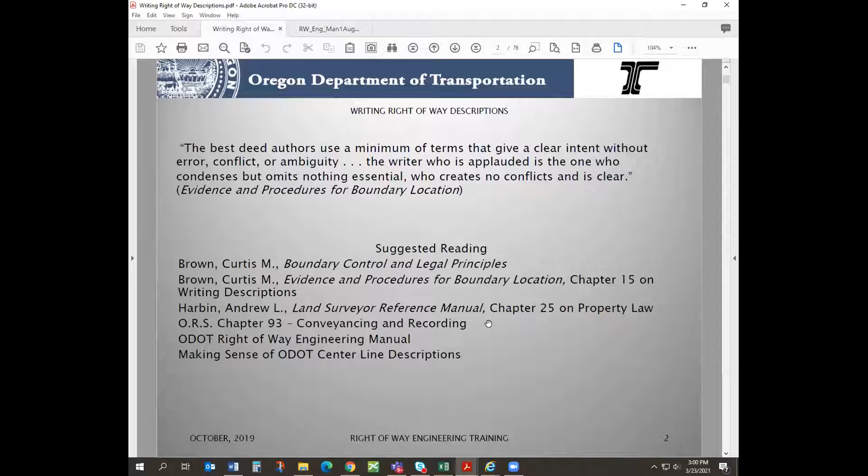Also, there's suggested reading, and you can do this if you want, but I would suggest the description writers review all these. They probably already have, but it's always good to go back to them. There's some suggested reading.

Now, the thing that's important to understand about description writing is that it's just one part of the deed. There are all the statutory types of deeds, but the deed is made up of a type of deed form, and it's got conveyance language in the front of that, and it calls out the grantor and the consideration and the grantee, and then it has a description.

But most ODOT descriptions - there's some of them that aren't this way - but we usually refer in the deed to an Exhibit A. And then in that deed, they go over conditions and covenants and restrictions and easements, and then they go over the signatures, and then they get to that Exhibit A, and then they have a county stamp at the end. That's how you know, because a description that isn't, or a deed that isn't filed, is no deed at all. A deed has to be recorded. So anyway, this is the part that a description writer deals with, and that's their bailiwick.

All this other stuff is the bailiwick of really a lawyer.

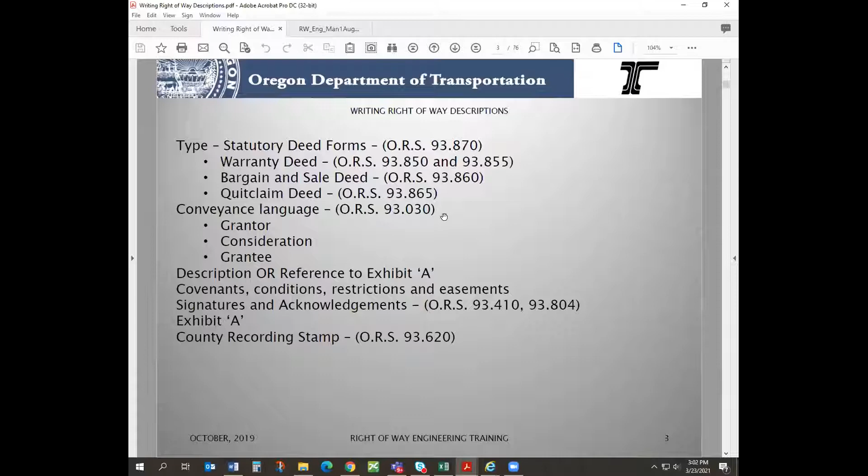So our right-of-way people are in charge of that, and DOJ controls a lot of those languages. That's a lawyer's job - you might be a surveyor and a lawyer, so you could do the whole thing, but this part is only about that exhibit part, the description.

This is from Evidence and Procedures for Boundary Location, describing what's desirable for a land description. It contains a title identity, it's not going to interfere with other senior rights, and it should be written so that either at the present or in the future date, it can be located by a competent surveyor - all surveyors are competent, I'm sure.

And if they're not competent, the board and the lawyers hold them to it. It should not contain words capable of alternate interpretations, like ambiguities. It should contain measurement data sufficient to describe an area of land that closes, and it should be based on a recent survey.

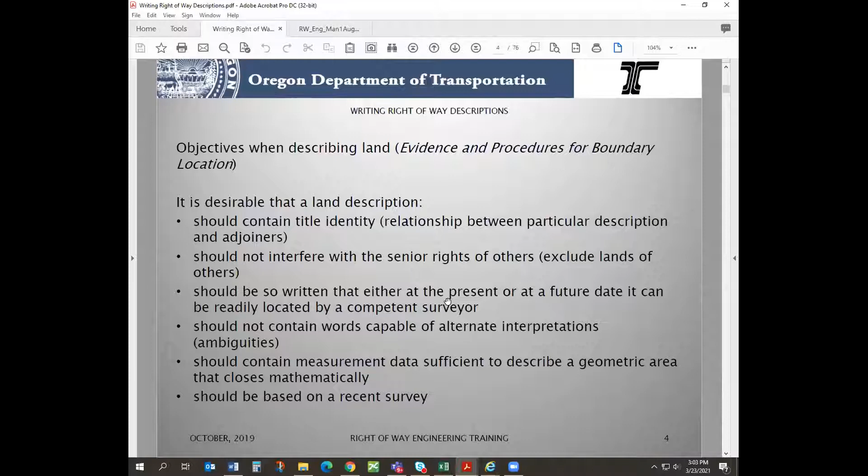This is background stuff, but when writing descriptions, there's some rules you could follow for construing descriptions if they're doubtful, or there's not sufficient circumstances to determine it. But that's if the description's doubtful. Even then, we use these different things to determine what the description is referring to and what it's actually describing.

This is how we get away with it, because once it's a deed, it's the deed, and unless it can be proven there's an error in it, it's going to hold. So if there's ambiguities in it, this is what a surveyor uses to figure out the ambiguities.

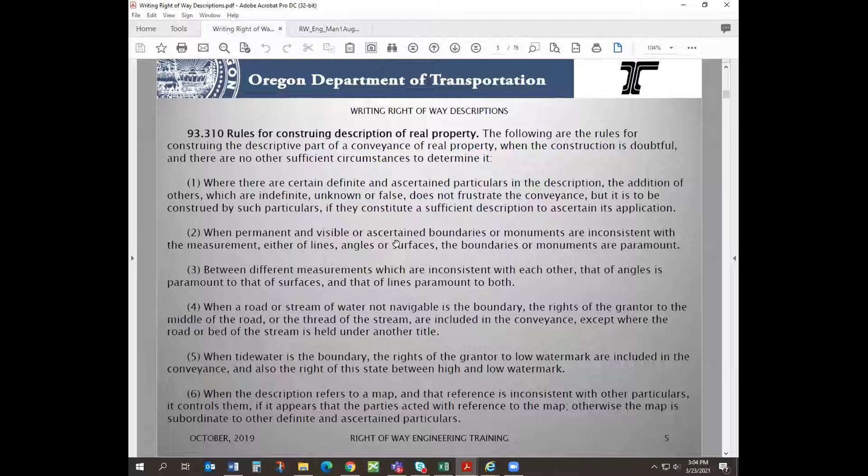I'm not going to go over that, but I'll just go over this. You can read these. We're going to have all these things on the internet.

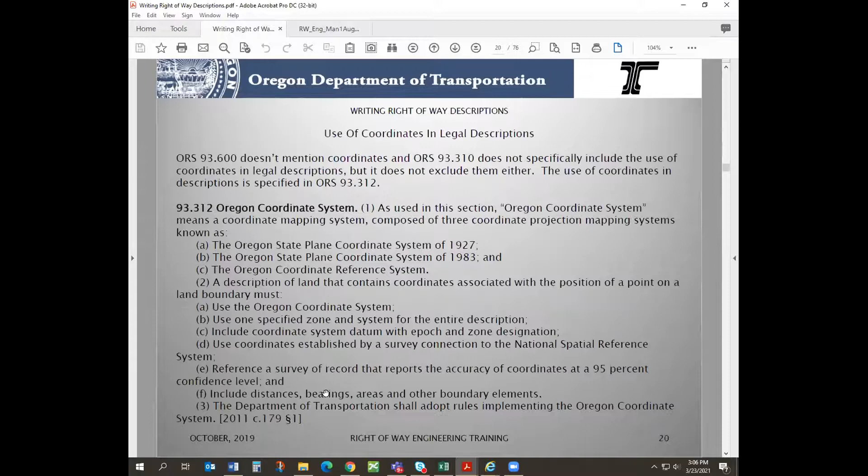This is all kind of background information. I'm going to go over this quickly too - this is about coordinates, and Scott put this in from before. But basically, ODOT does not prefer us to use coordinates in the legal description. That's really all you need to know, but description writers can refer to that statute and read through it. It's always good to refer to things again and again to remember.

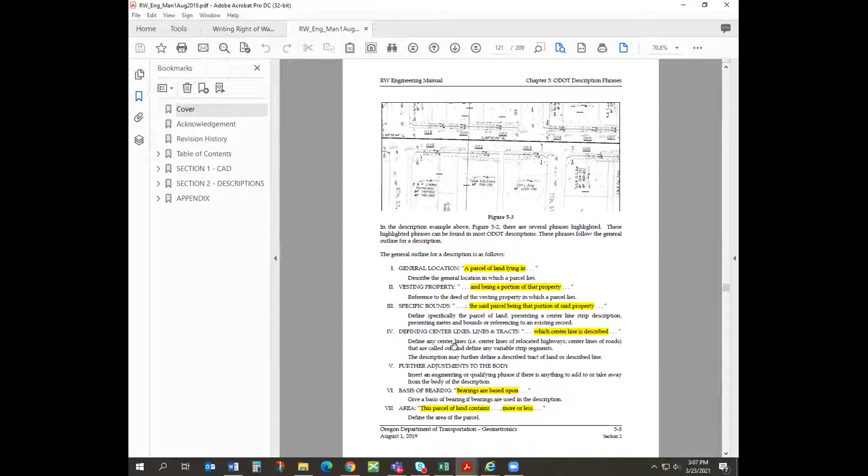Now, this is how our descriptions are basically structured. The other thing I want to show you in the manual is that it's structured a certain way - but in this manual, phrases is the chapter I go to a lot. In that phrases chapter, I show just a generic description, an outline of how that description would go, and then different phrases as you go through the description of how we like to see them written.

A lot of times I'll be going into the manual at this point to see how I wrote that before, and it's just in order of how you write it - that's what I would do as I'm writing the description. This is a really good chapter to review, and I like to open it up like this where you see the pages and the bookmarks labeled. This is a PDF, so you can go back to the cover really fast, or go to different places.

They also have pages, but I think this is better because then you can get around the manual. Another thing I wanted to show you is, let's say you wanted to find out about areas. The quickest way I found to use the manual is just type in areas, and then you can go through and look all through the manual and see where you can find out about areas or whatever topic you're looking at. That's how I find out in the manual how we like to do things.

But let me go back to our topic. The parts of description are written a certain way: there's a caption, there's the body, there's qualifying clauses, and there are augmenting clauses. The caption is just basically saying this is where we are in the survey land - we're in a section, a county, a city, this state. That's just the general idea of where this parcel we're going to describe is at. It doesn't get into the meat of the parcel yet, it's just saying this is generally where it's at.

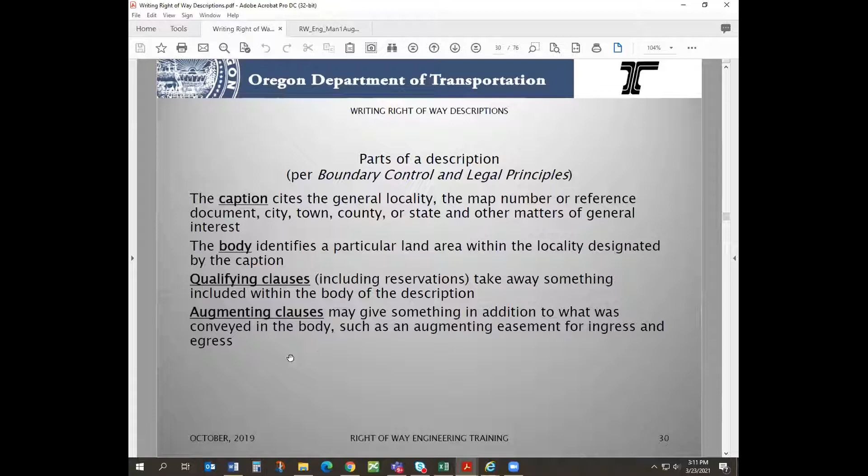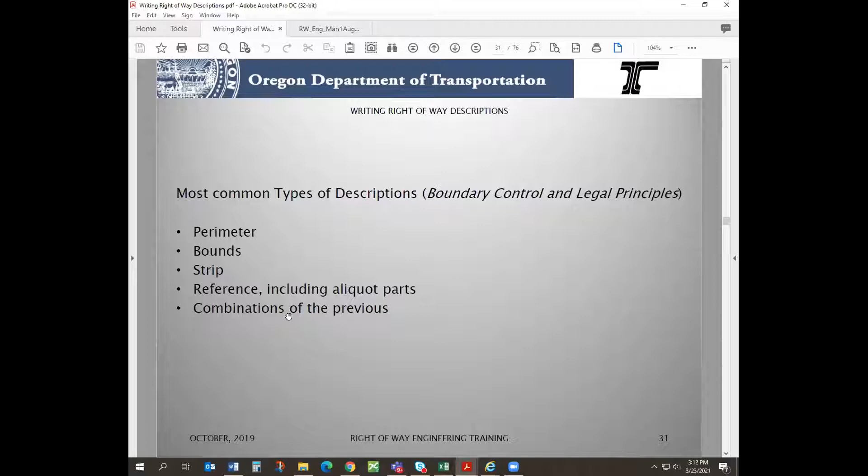Let's go on. So there's lots of different kinds of descriptions. Our typical description, because ODOT's property is mainly corridors, so we usually write a strip description with an alignment in a strip. But you could also do a perimeter - sometimes we write perimeter descriptions when we're talking about land away from the highway, like when we bought some rock quarries, we'll do a perimeter. Or you can do bounds - in some ways everything's bounds though, a strip is a type of bound. There's also references to the main system of aliquot parts, the government property, how it was originally put together, sections. You can do combinations thereof. You can look in boundary control and legal principles to figure more out.

Now, this is just like Mike showed - this is a file description, and this is another thing I want to show you from the manual. There's a certain form we have, and I'm going to go to the cover. This is in that chapter on descriptions, and if you go to the end, you'll find this is the form you'd use for the seed file for a description. I brought one up - here it is, and this is what it looks like. There's two pages, and I always use this to start out a project. I'll do a generic one, then I'll copy this and start writing my descriptions, then I'll just copy them again and change them. This is set up with an addendum, the old style of addendum, and this is the exhibit part.

Now, one thing I want to show you in this file is in the exhibit part, there is a chart in here that's a cell chart, and it's best to use this because then you can just easily go into cells to put your different station offsets. There's also this little end thing, it's best to keep that in there. You can get rid of some of these lines, but I would keep a line, because that makes this other thing work out, this page thing. So just realize that. Now, when I work on this, I always use this copy as my generic.

And this is mainly just metadata that's going to go into RITs eventually. And then in RITs, I just want to go there. I don't know if you guys are supposed to be able to see this, but I'm right now.

So this is like a property in RITs, and this is the legal part of it. And I'm just going to go to file 2.

Anyways, when we're in RITs and we do all this stuff, we will generate an addendum. This one, the addendum has been generated, but what that does is it generates this addendum to look pretty much the same as we had up on our screen there.

Oh, you guys can't see that. But it goes over the same stuff, and it pulls all this stuff. And this access control language, it pulls from the part of RITs that the right-of-way specialist puts in there.

The description writers aren't in charge of this anymore, because like Mike said, we don't want to play telephone and get it wrong. And also you should be at your meetings you get together for the layout meeting. That should all be established by then, and people should know what each file's going to have.

But looks pretty much, this was a generated addendum. I think I generated it, but it pulls all the stuff in, so it looks basically like that other addendum that I say you should fill out.

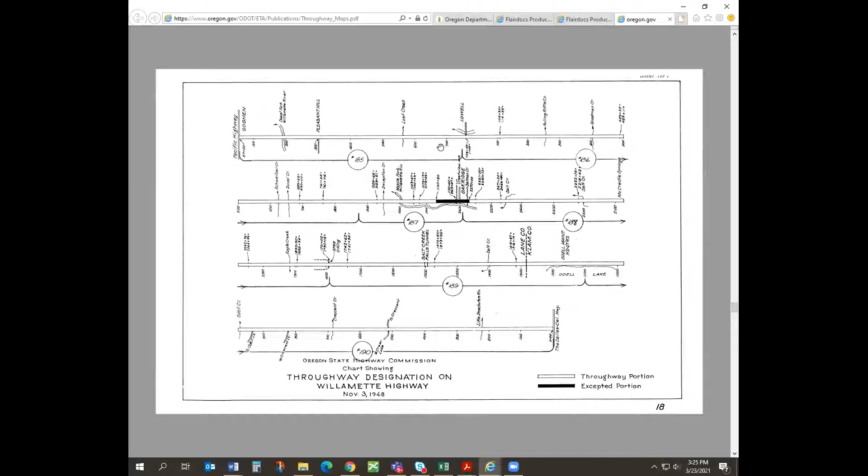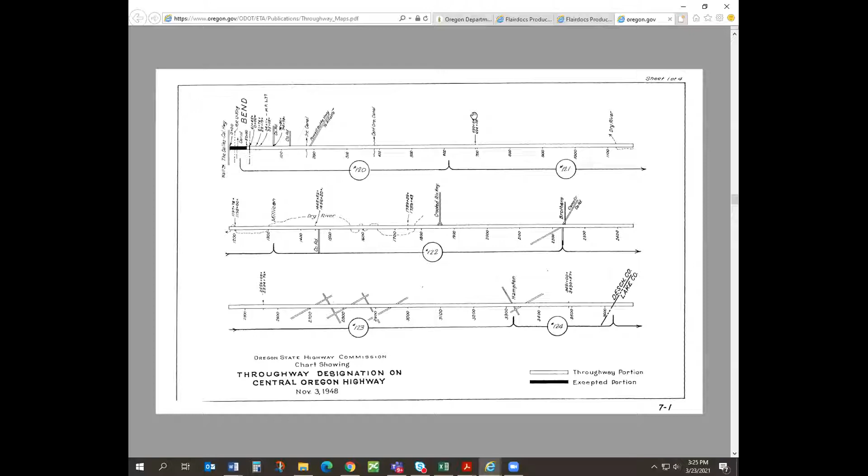Okay, right. And it has to do with access control kind of rights at the time, basically, right? Yeah. It really has to do with that throughway law, and the only reason we still have it is because it was the bailiwick of the commission to determine where the throughway was, and they want to see whether any of this project is on their throughway system.

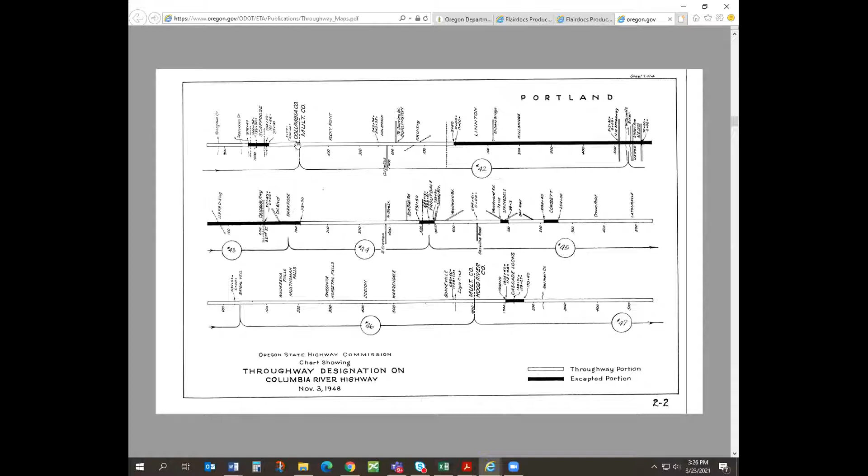But it's really kind of stupid because nowadays things have changed so much. There's probably 10 properties on all these things. But in order to call it a throughway or non-throughway, you have to go by the time of the act. So it's kind of a weird thing.

I hope eventually you might talk to right-of-way people, they might know more about, or the people that give these project files to the commission. But I think that's the only reason we have to put that in there is because the commission wants to know.

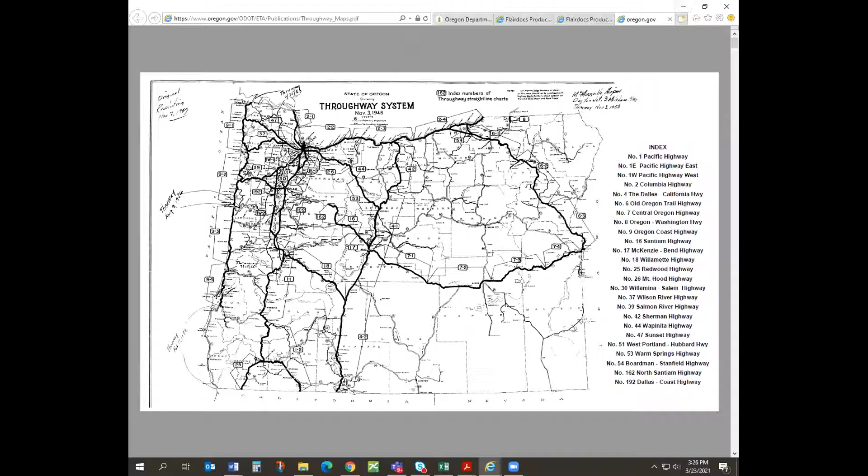Anyway, going back to the topic. We like to put, after that, in the addendum, we like to put the vesting deed owner who we're buying the property from, their name.

If there's only one parcel, we don't really say anything. But if there's several parcels, we'll just list out whatever, like if there's 3 parcels, we'd say parcels 1, 2, and 3. Okay, and then that's what you're going to have in this addendum.

But this stuff will be pulled. If you know it, you can put it here. Up here is just the major control phrase, access phrase. This one is control the highway. Let me show you in the manual where that is.

I'm just going to look up access. Access key phrases. Okay, so there's all these access key phrases, and these define all of them. This is the place to go to look at that. But most of that's supposed to be determined by the access control specialist and the project team.

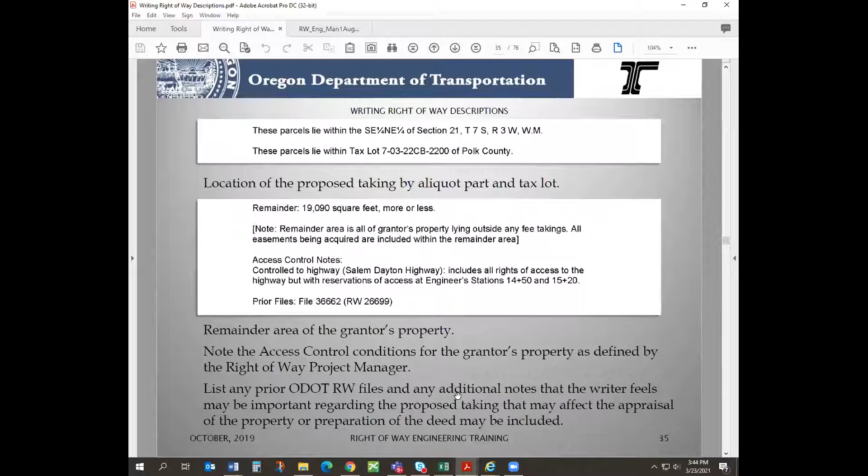Okay, and then you get to the Exhibit A. Our exhibits are such that, like Mike has said, we define whatever, and you need to talk to the agent. Sometimes you have to split these into two files or two parcels, but we usually define all the parcels we want to purchase from the property, from the vesting property. Usually we have all the fees up front, then the permanent easements, and then the temporary easements. Sometimes the first one, if there's any access being bought, is access, and access is a type of fee. It's one of their bundle of fee rights.

And then there's the fee. Okay, and this is part of this. The addendum we're not going to have in the deed, but this is the part that's going to go in the deed, the exhibit. So that's why it's signed.

And at the top, when we come to these later and look at them, the recorded copy, we can tell what file number it was, what drawing it came from, and we want to know the date of the thing. This will be in there too, in Exhibit A. So that's in the header of everything.

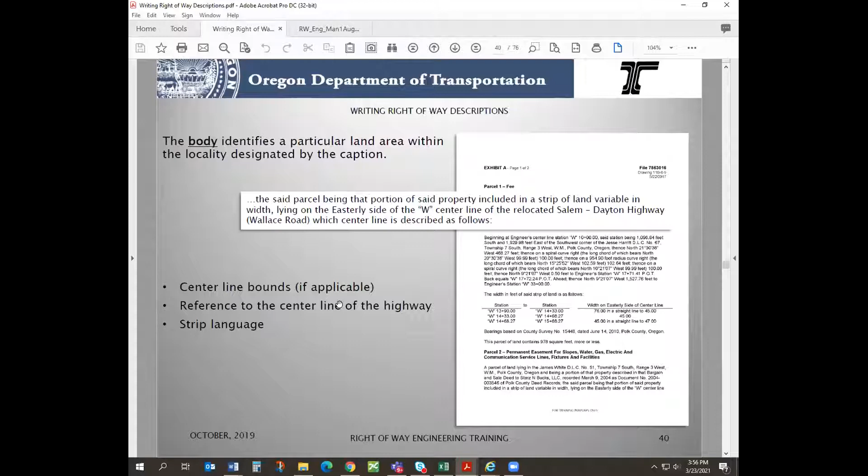Okay, there's another way too, not only to describe property with a bound, and it's not just the center line. Sometimes we use what's called a described line or a described tract. Instead of the center line, we'll refer to a described tract or a described line, and it consistently looks like this.

I keep forgetting to do this, but I'm going to go back to the manual and go back to one of these chapters, because all these examples are right here in chapter 4. Here's an example of a center line, which is described as follows, and this is typically how they all look. They all start at a certain station, and this first station is referenced to a government corner.

Then you proceed on a tangent, and then you go through spirals, and this is the way we like a spiral to look. Thence on a spiral curve, we like to say which way, right or left - this is one time we use right or left. And then the long chord, which bears south, blah, blah, so many feet, and this is the actual feet along the alignment, 100. Then on the so many foot radius curve right, the long chord of which bears - all that information, this is the way we would show a station.

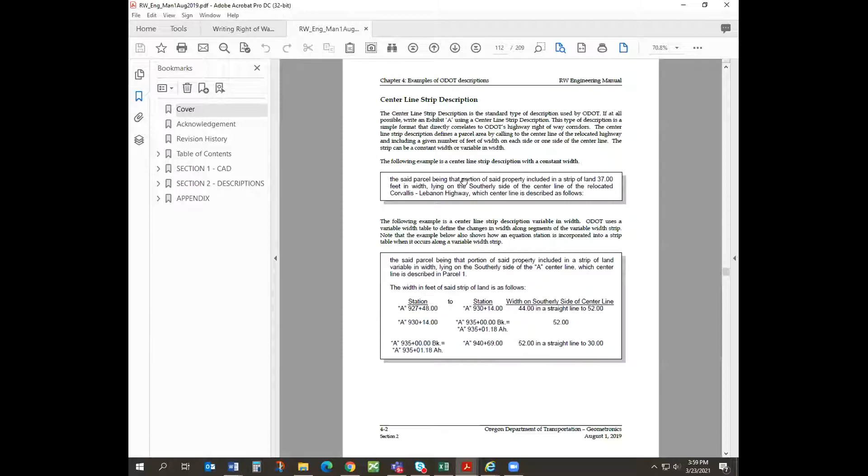And then there's the radius. But I was going to go to the next one too, which is what we're talking about, the described line - that's in here too. This goes over to, see, there's a described line. Usually the body goes, the said parcel being that portion of said property lying southerly of the following described line. There's a lot of different reasons to use a described line. It is a bounding call, because sometimes you can't do a strip description because a lot of the segments are going back on line, so there aren't really a segment. I'll show you that later too, but this is just a way we like a described line to be looked at.

Usually what we do is call it out and begin at a point to a certain station. This is the way we like to say those offset calls, like a station offset call - we like to say it this way, and this is the way we've done it for a long time at ODOT. Thence easterly, we give a directional call, easterly in a straight line to a point opposite and 135 feet directionally of a certain station. Basically it's just a station offset, but that's the way we like to write it. We're talking about a particular point that's opposite and so many feet directionally from a certain station, and that can go on and on. We always use, if you're going to go to a next point, station offset, you would write the same sentence, but give its opposite point and its station on whatever center line.

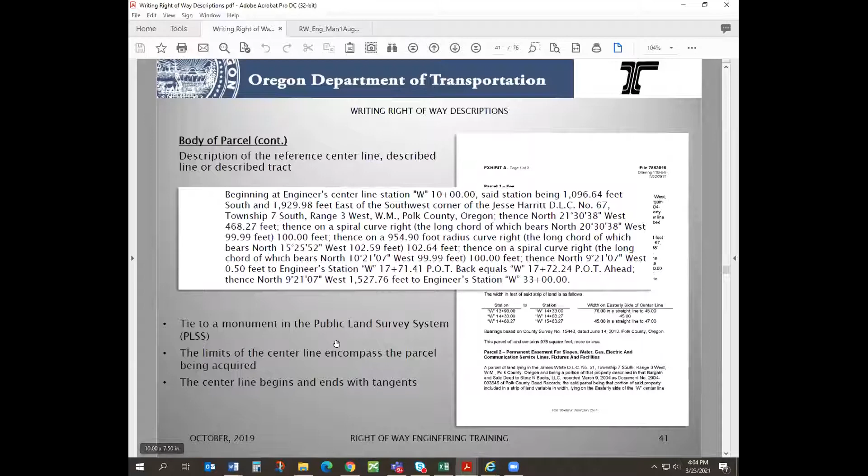Okay, so yeah, that's some stuff we said before, beginning and ending with it.

Okay, then we get into variable width tables. Usually up at the top, when you get into that situation, the said parcel being that portion of said property included in a strip of land, variable in width. So what that implies is, when you have a variable width, sometimes you can have like 50 feet in width, and then you've got it already. You don't have to describe a table.

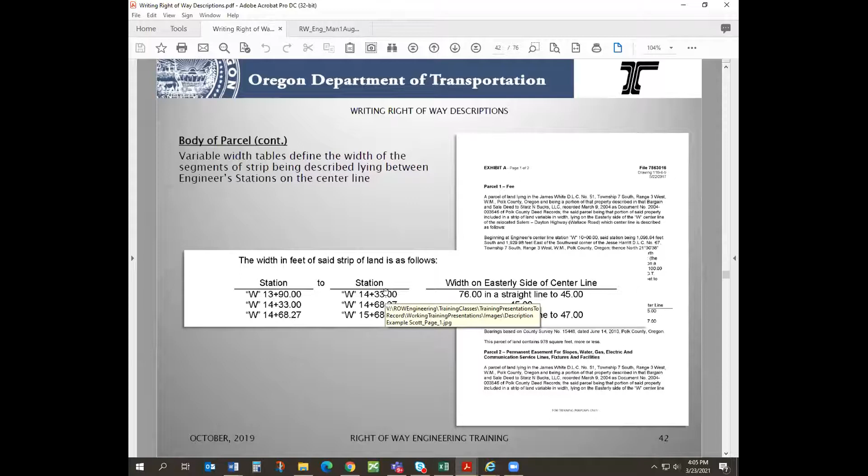But if you have a variable width, then this is the way we like it to look, and then you'll use that table. I'm going to go into this later to show you variable widths more intimately, so I'm going to wait on that.

And then after that, if you have some kind of bearings or distances in this project, like up there, you can barely see it, there was a north, you have to have a basis of bearing statement. Because where does that come from? And then that gets people into what bearing system you're on.

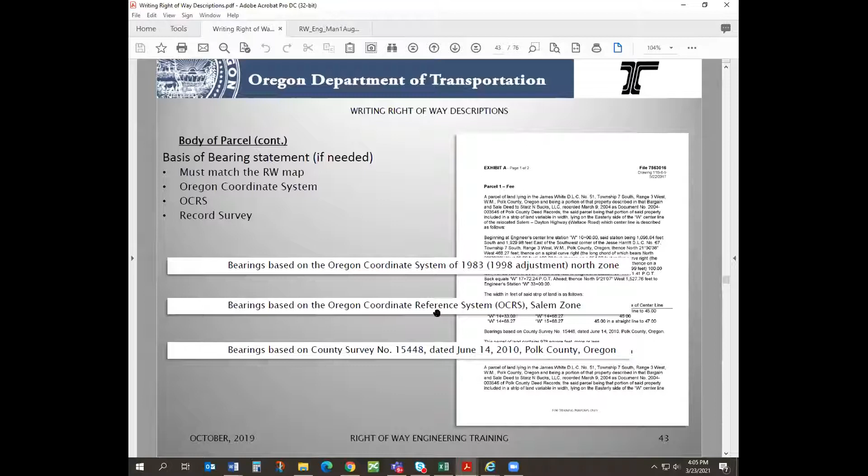You can call out the Oregon coordinate system. There's different ways of showing that. I'll show you in a minute where that is in the manual. They can be based on OCRS, or they can be based on a survey.

Let me go in the manual and show you the basis of bearing. We'll get to here.

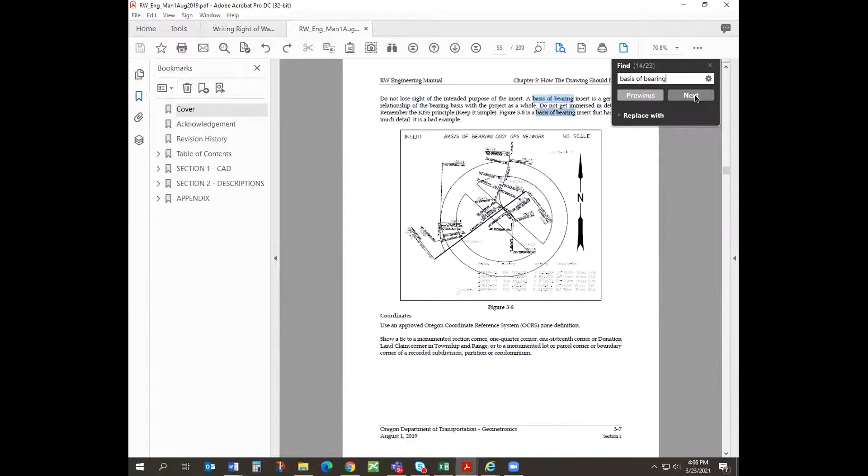There's ways we show it on the map, but there's also ways we show it in the description. Here's some examples, I guess that's on page 36, basically the basis of bearing statement. There's different examples of how we show our basis of bearing statement. Usually it's the last thing we put in the description, except for the very last thing, which is the area.

So anyways, a quick way to look for things in the right-of-way engineering manual, this is all in there, is just to do a find. Let me go back to my...

Anyway, so that's it, and then the area statement is the very last thing. And like I said before, I'll mention again, every area we put in there, we put it to the square foot. If it's over an acre, we'll put acres to the 100th. And we always put the statement, anytime we say an area, we always say more or less.

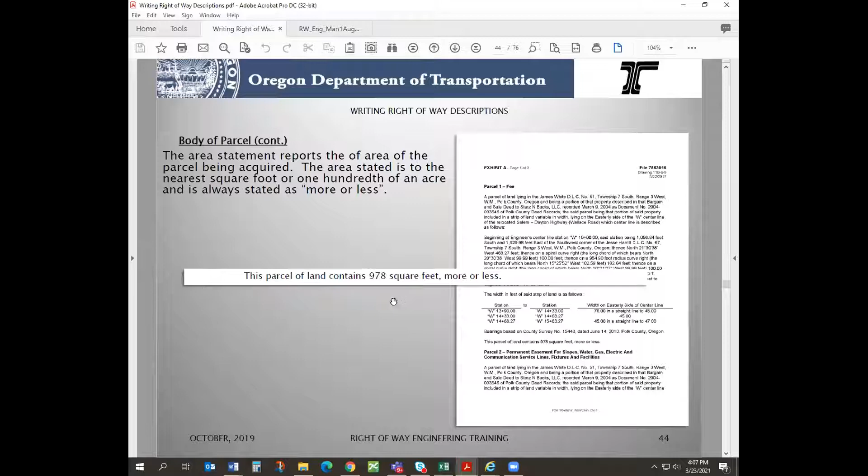Okay, this is an example I want to show you guys. Let's say the property went out to the center line. Their actual property did, but their deed calls it the center of the highway.

Now, when we did our description, I just wanted to note, we will describe this whole fee. We'll call it their piece, bounded by their piece, which is only to here, and we'll call out all the way to the center line. But because of that, we also want to except out. This is one of those augmenting clauses, or take-away clauses. We will say except this property, and call out our deed and stuff.

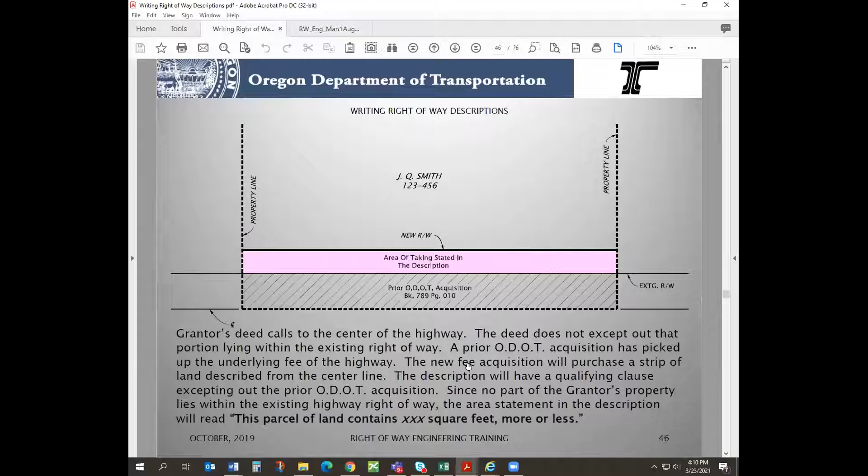So anyway, in the area statement, we wouldn't have to say anything. We'd just say more or less, because that's the only property we're purchasing. We already purchased this, and we'll describe this whole thing, but then we'll except out this parcel we already bought from the description.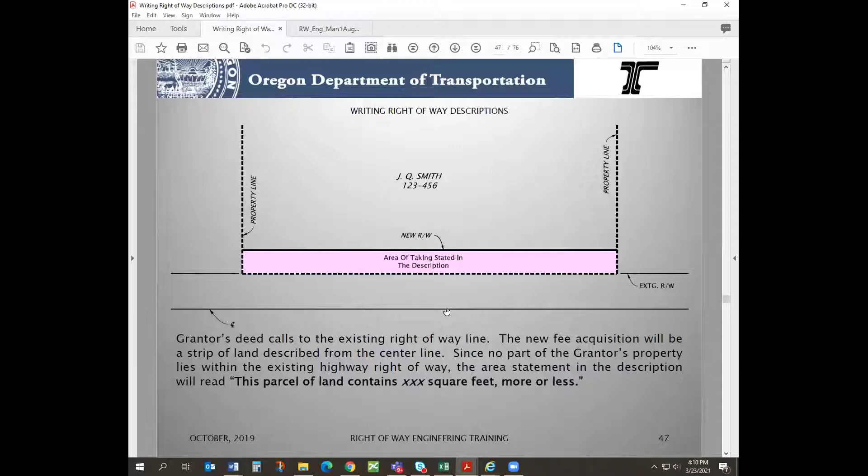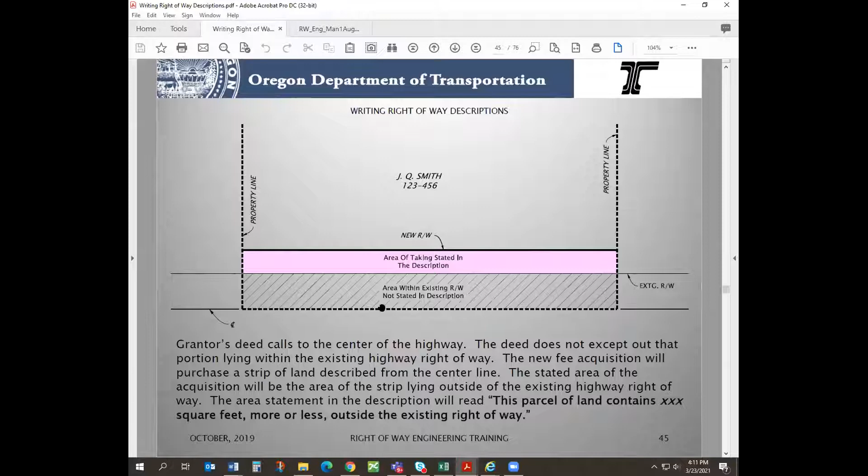So it's important how you state the area. The main thing is this one, where we want to make sure that we tell them exactly what area we're talking about. What area that we're talking about, the whole area, because it describes out to there, but we're only going to say the square footage of the area that we don't have some kind of right to already.

And then I just want to mention again also this whole idea of the qualifying clause. We're excepting things from the description above. We described parcel 1, and we defined it, and then we except out from parcel 1, or except something out of it. And if there's more than one except, let's say we except out parcel 1, but we also except out some other thing that was not part of this parcel we described. If there's a case where there's more, then you just cap 'also except' and go with it. You don't have to bold it, you just cap them.

See, this is excepting out a particular deed. And then the augmenting clause is the same way, with 'one' and 'also.'

You know, when Mike and I do descriptions when we're giving a bunch of our property back to the city or something, we're relinquishing it back, we'll do a lot of these phrases. We'll start out with 'also,' and sometimes I've had 50 'also's,' because we give them a parcel and then all these little pieces of parcels that we don't need for the highway anymore.

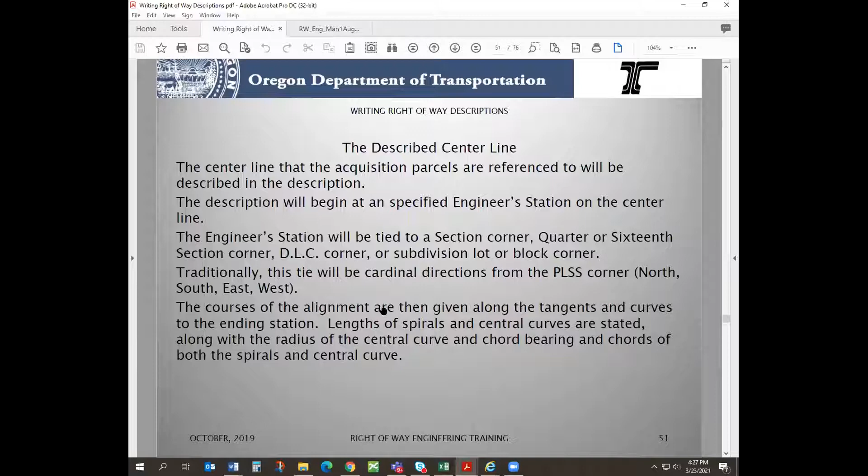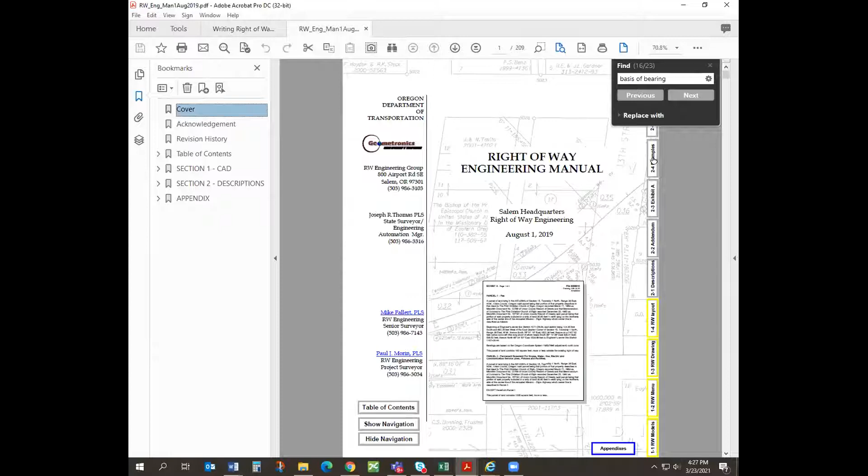Then it goes over the courses of the alignment and goes through all the curves. Like I said, it starts with the tangent, ends with the tangent. Okay, there's an example of it. Also in the manual, you saw that chapter that has all those examples of the different kinds of descriptions. Oh boy, okay, where is that thing? Okay, so that's an example.

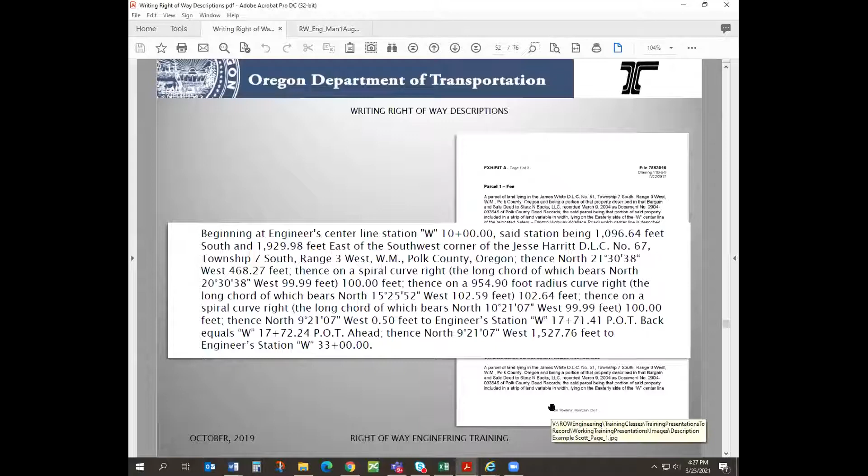And also a center line, if it's in a particular description, it's usually described in Parcel 1 if it's needed. And then from then on, Parcel 1 is referred to.

Like you could say referred to here, and it's described in parcel 1. But if there's any kind of station offset or a center line in the description, you need to define that. And then in the first parcel, if it's in there, or maybe it's only in the second parcel, but then if there's other parcels that refer to that same center line, you can just refer to the parcel that it's described in. And then also you can refer to a center line that's described in another deed.

A lot of times we do that because what we don't want is to re-describe something and then get an ambiguity or a difference from the original description. So it's good, if you have a description, that alignment that's in another deed that you want to call to, you can call to that deed.

Described in, center line is described in, will be referenced in the parcel description. Which center line is described in that deed to the state of Oregon by and through. This is a way we define the state of Oregon a lot of times. But however it is defined in that deed is what you call out, and then you call out the deed information.

And this is the way we do equations, remember. We spell out equals, we don't ever say equal. We don't have the equal sign, we spell it out in the description. And this is the way we do a variable width table.

Now, when a description has a variable width table and there's an equation station that this strip goes through, we need to define that equation station. Otherwise, it could get really confusing because they might not consider it, and then they're off on station.

So when you do that, you would just do it like this. You'd say from whatever station the strip goes to that equation station, and it looks like it's 52 feet southerly of the center line, that corridor, that segment. And then you do that equation station to the next station, and then it goes 52 feet at the equation station in the straight line to 30 feet.

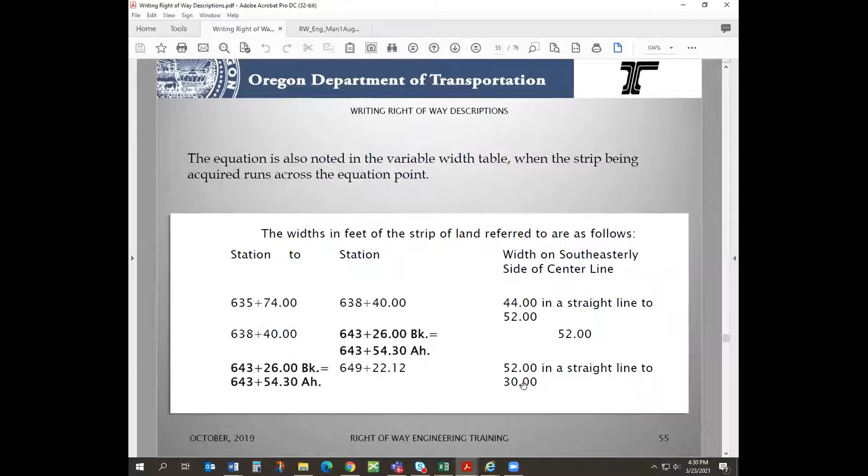So a strip of constant width is, you don't need a station equation, you've got it already. Including a strip of land 40 feet in width lying on whatever side of the center line. That is a constant width strip.

But if it's a variable width strip, you always have this variable in width, and you always have this after the center line description. But this one doesn't have a center line description because it's done in parcel 1. But after that, you would then put the variable width table information.

And remember, that variable width table is actually in there with cells in the background. I'm going to turn the paragraph off, but that's what it looks like. So that's easy to fill out. I saw some descriptions come in where they tried to simulate this table with just tabs, and I think it's better to just use this one because it's easier, you can add to it.

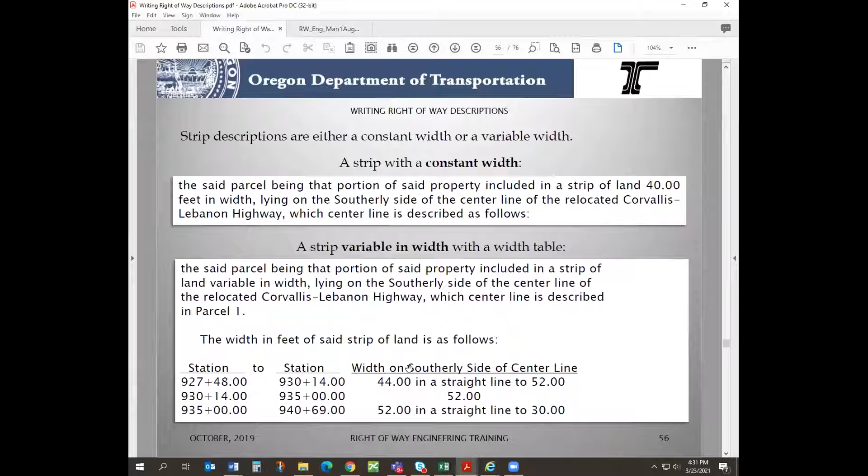So let's keep going. Variable width table and the description can first be difficult to interpret. So I'm going to go through the variable width table. This is a really good example to show you, because the variable width table and that whole concept is talking about segments.

It's not talking about this line, which is a described line. You could describe that one, but it's talking about segments. So, yeah. So the first part right here is going from this station to this station at this width, 40 feet. So it's a segment. And then the next one is segment 2.

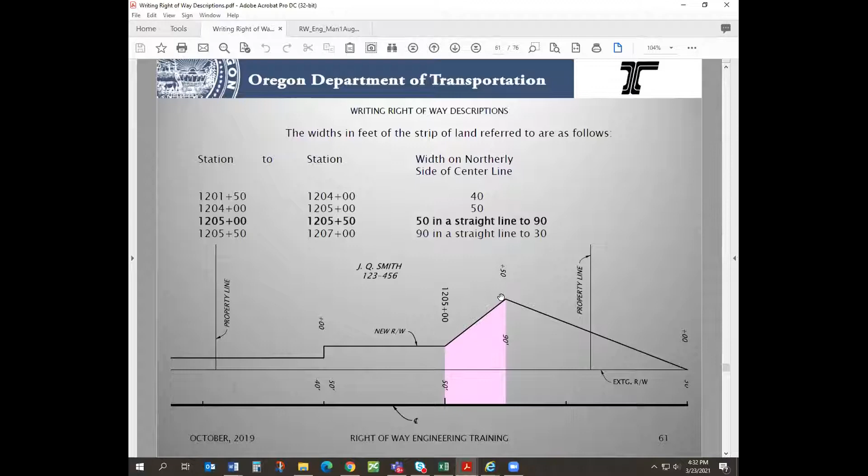It's going to be from this station, which is the same one as that, to this station. It's going to be this width. And then the next one, it's going to be from this station to this one. It's going to be 50 feet to 90 feet. And then the next one is that, 90 feet to 30 feet.

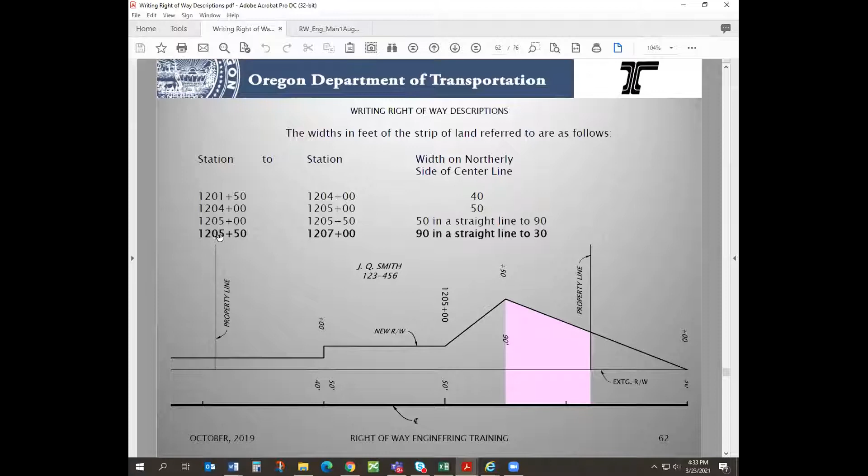And then, so it ended there because the property ended there and we didn't need to go on. But sometimes I think you would go on, but it takes in this. See, this one is from 1205+50 to all the way out to 1207, which is here. So the line goes all the way here, but the segment's only to here because it's only their property, because we've already bounded by this property.

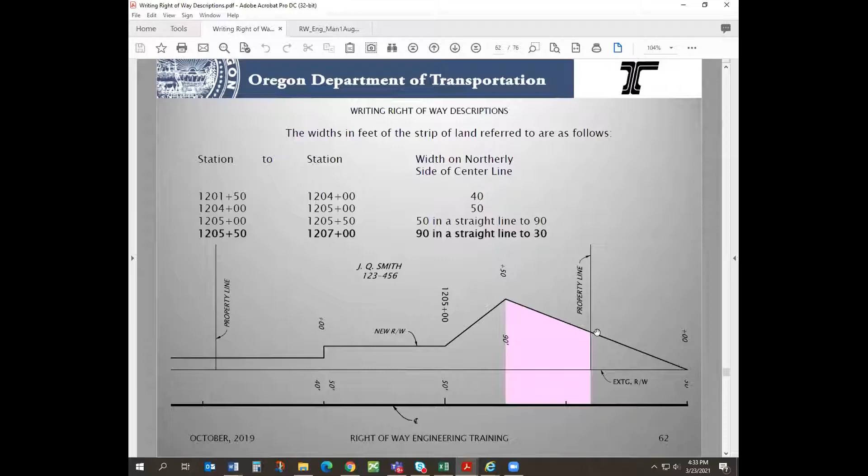Anyway, so this is kind of a false callout here. So there's the whole thing. That whole strip description table defined this whole thing in segments.

Sometimes people make the mistake of putting in the strip description, they'll say from here to here, it's that width, and then they'll go from here to here, and that's not right, because there isn't any kind of a segment from here to here. It's just, and you're going to get that in the next segment, because these are the same station.

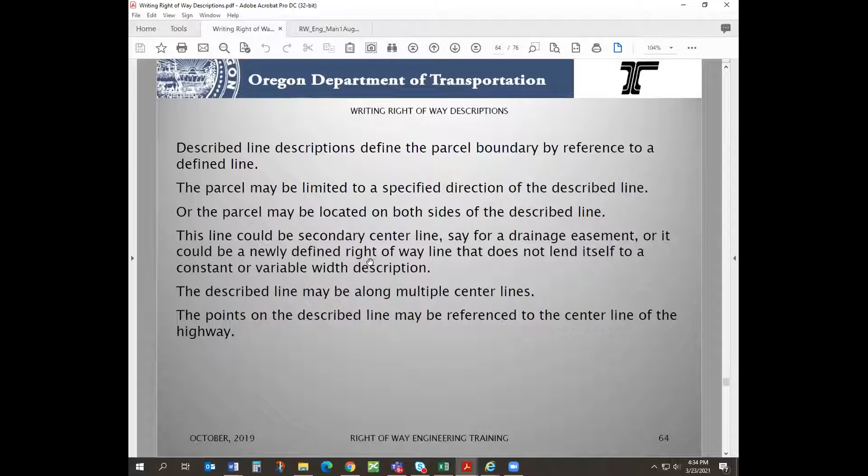Also, usually it started that you go ahead online with these strip descriptions. You could go the other way and it would still work if you did it right, but usually we don't like to go back online. Remember, let's say this piece we wanted to buy had this weird angle, going up here and then down here. That would go back online, so the segment from here to here would be weird.

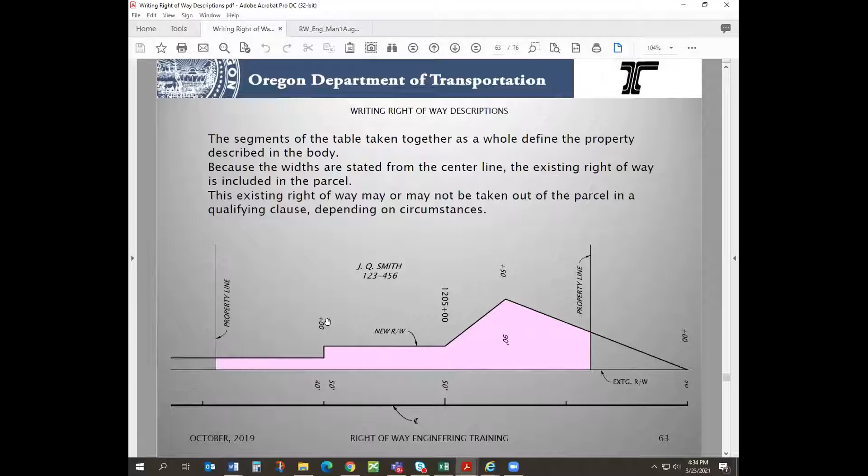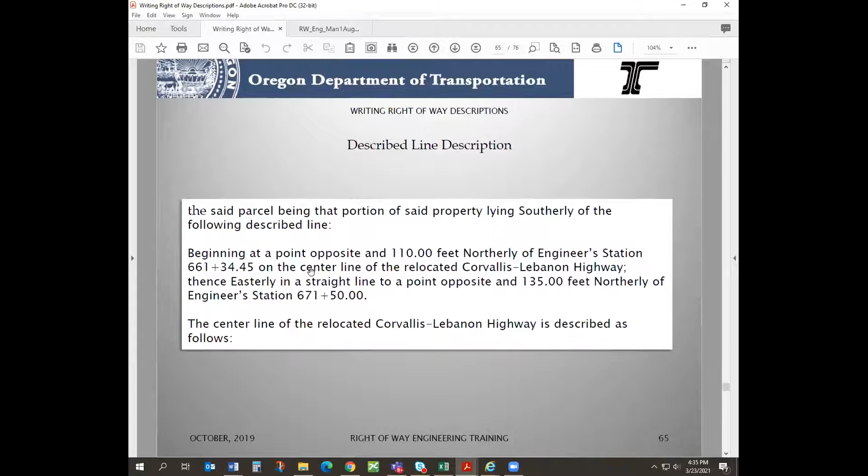This is how we like to describe a line, like I showed before. Usually we say this point opposite 110 feet northerly of a particular station on the center line of the relocated highway. Once you first call out a station, you refer to that center line, and from then on you don't have to say it again, unless you give an end station or move to different stations, in which case you restate the center line. After describing the line, you always want to define the center line, either by referring to another center line in a deed, a center line in the parcel above, or by describing the actual center line.

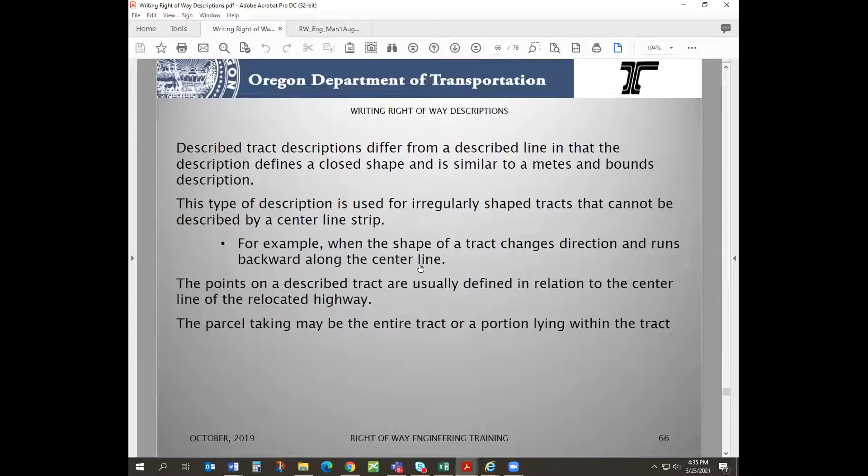You can also do a described tract, which is a described line that comes back in on itself, kind of like a metes and bounds, but the way we like to do it, using our station and points opposite a particular station. Notice we always begin at a particular station of a particular center line of a particular highway, and then proceed until we come back to the beginning.

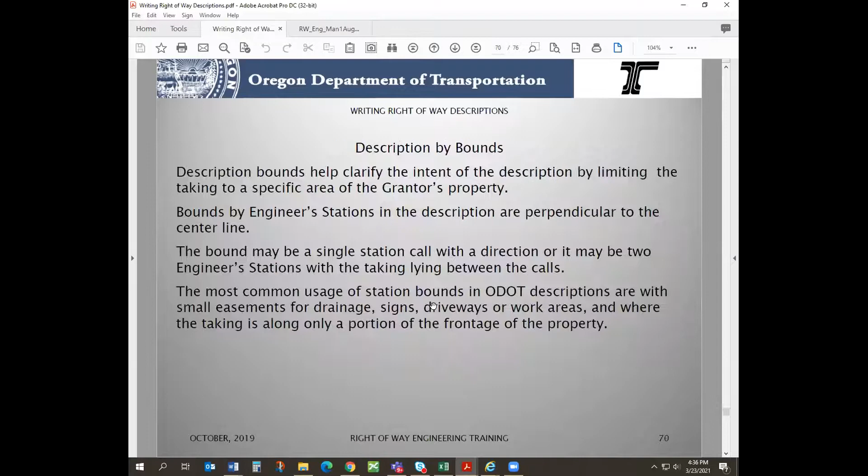What was that, Mike? I was going to say, don't be late, Paul, you've got a meeting at 4:36. So, are you pretty much at the end? Yeah, I think I am. Well, yeah, we've kind of talked about that. Yeah, I think I'm done. I'm going to hand it back to Mike, he can talk about questions and other things. Thank you, Paul, appreciate it.

Paul is heading to a PERS retirement meeting because he's retiring and leaving me, so that's why he's excited to get out of here. This may have been his last presentation. We'll see, but thank you Paul, I appreciate it and all your people knowledge. You should realize there might be a job opening over there. We don't know that yet. Exactly. Okay, thank you, see ya Paul. Thanks Mike, thank you everybody, and thank you Audrey. See you later, Paul, you need to get out of here.

Say hi, you're not muted yet, so don't swear. Just hover up near the top and it should pop down with a stop share option, or pause share, I can also stop you. Yeah, could you please get me out of here? All right, I got you. Okay, bye Paul. Bye, thank you Paul, I appreciate it.